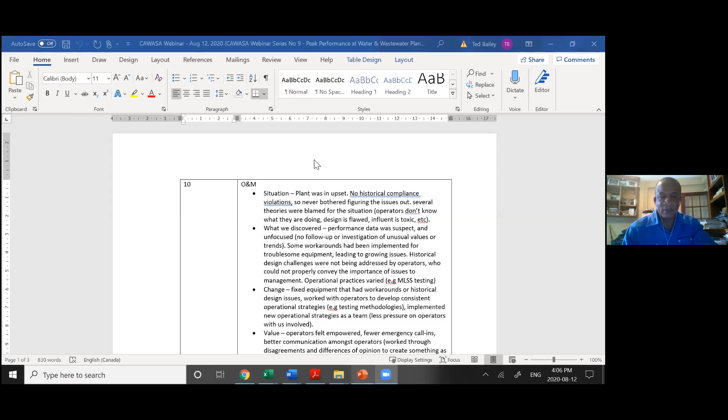Okay, good afternoon everybody. As Ignatius mentioned, we're giving a presentation slightly modified, but similar to what we gave in St. Lucia in February. It's about improving performance of treatment plants with a focus on enhancing existing resources, enhancing skills and resources within existing staff, I should say. So basically, in layman's terms, improving quality, reducing risk, reducing costs by using existing infrastructure, existing people, and through modifications to operations, maintenance, and management practices.

We've been doing this sort of service since 2005. As Ignatius mentioned, we're a Canadian-owned firm that's primarily worked in Canada, US, and a bit in the Caribbean, with WASA in 2008, 2009. We've been under a big push to work again with the Caribbean. We're doing quite a bit of development at the annual conference, and we've actually met with some of you over the past year and a half, but COVID threw a wrench into those plans. But we are hoping to restart some of that.

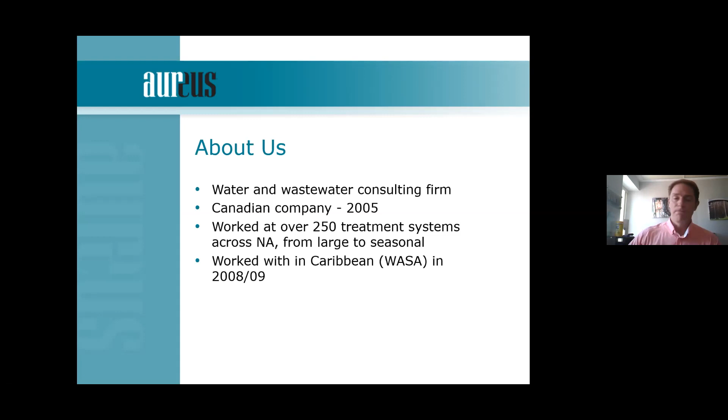Basically what we do is, we're not a design firm, although we are an engineering consulting firm. We focus on people first, ground-up solutions where it's focused on skills transfer. So we do a lot of procedure development, operations and maintenance procedure development, a lot of process consulting, health and safety assessments and hazard analysis, and maintenance and asset management consulting.

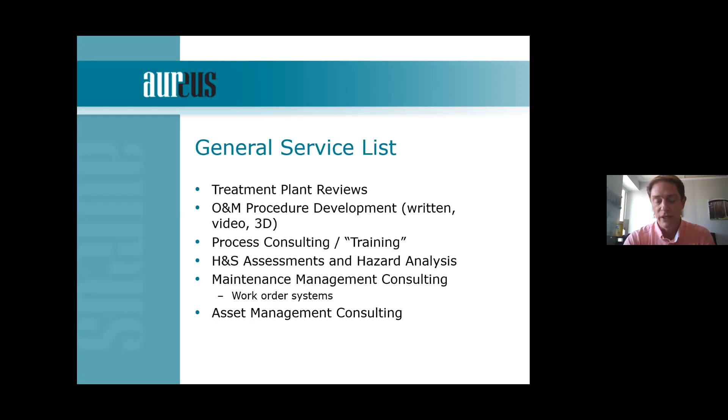So what we're going to talk about today is a program, or a tool actually, that was developed by the US Environmental Protection Agency back in the 70s. At the time, the United States had invested quite a bit of infrastructure money in the late 40s and early 50s, and these treatment plants were aging. The government realized they needed billions of dollars to upgrade these systems to current standards, to meet compliance requirements, performance requirements, etc. So in an effort to identify cheaper alternatives, they developed this Composite Correction Program out of the Denver Drinking Water Office. The goal of this program was to identify opportunities to improve efficiency, reduce costs, work with existing infrastructure in order to extend the life of these systems where possible.

It was very effective, but surprisingly it kind of fell off the map. I think one of the reasons is that from a consulting perspective, there's not as much money in this approach as there is in designing new treatment systems or new processes. So that's what we're going to talk about today: the thought process that goes through identifying what the root causes of a particular issue are. We're going to go through how one does that, what the typical root causes are, and some success stories about how we addressed some of these in our experience.

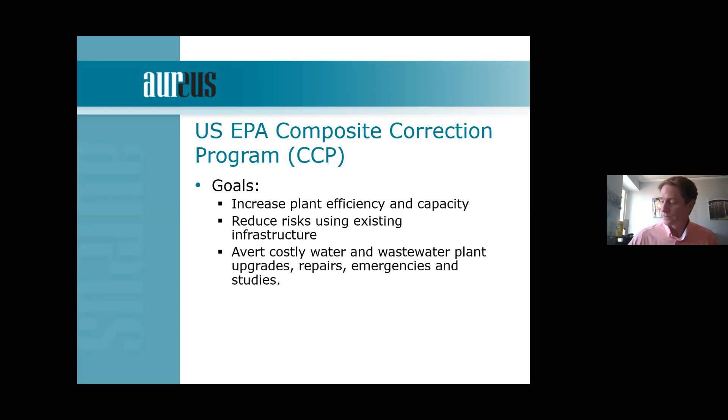I've mentioned a little bit about this. The approach of the Composite Correction Program is to work with operations, maintenance, and management staff to identify areas of improvement. It's really focused on empowering these individuals to ensure improvements are accomplished and sustained. I'll go through how one does that.

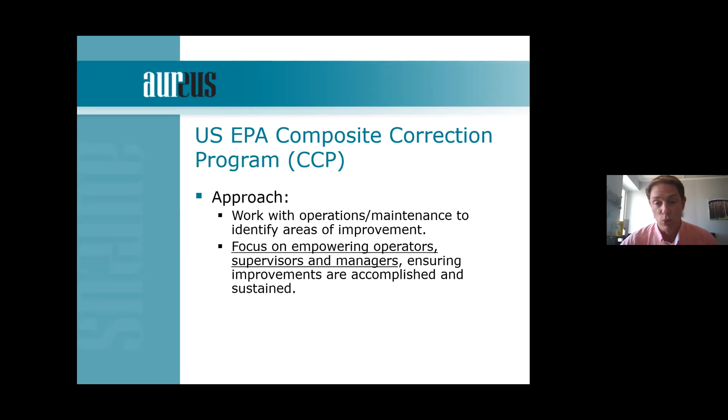In a way, it's a very simple formula, it's often about just listening. Most of these solutions are already available with existing individuals, the operators such as yourselves who have been working at plants for years, but sometimes the communication gets jumbled. Sometimes the messages get lost, sometimes there's just been a change in focus, or sometimes it's just easier for a third party to re-express some of this information. So what are some of the benefits?

This will become more clear as we go through the methodology, but essentially it involves establishing baseline O&M practices. We'll get into this in some of the examples, but in some of our experience, and probably yours, there are differences in O&M practices, maybe between operators, between shifts.

Maybe between generations. And these O&M practices can sometimes result in several paper cuts, if you will, that impact performance, impact production, impact risk, or they can be actually individually quite significant, but sometimes hidden in amongst the noise of the treatment process and alarms and other issues.

But that is one of the benefits. By agreeing upon standardization of O&M practices, we've seen tremendous results, which we're going to share today. Some of the other benefits: historical knowledge and lessons learned are captured at the activity and equipment level.

So this is something we're seeing a lot, and we're being called in a lot for these days, is experienced operators nearing retirement. Whether it's one person working at a facility or a very senior operator with junior operators. And sometimes maybe this senior person is unwilling to share information for fear of whatever. So what we do is try to tease that out and help pass on that knowledge to the younger generation or the new generation, whatever it might be.

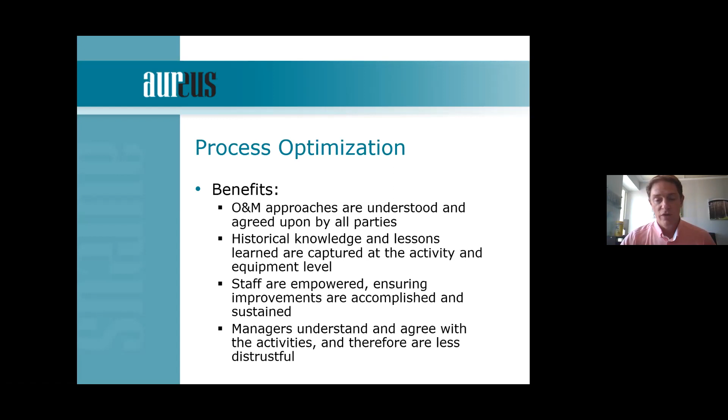By sharing these challenges in a collaborative way, and even as a third party sometimes saying something that has maybe been said numerous times before, there may be more opportunity for someone to hear that and change can occur, which is what we often see.

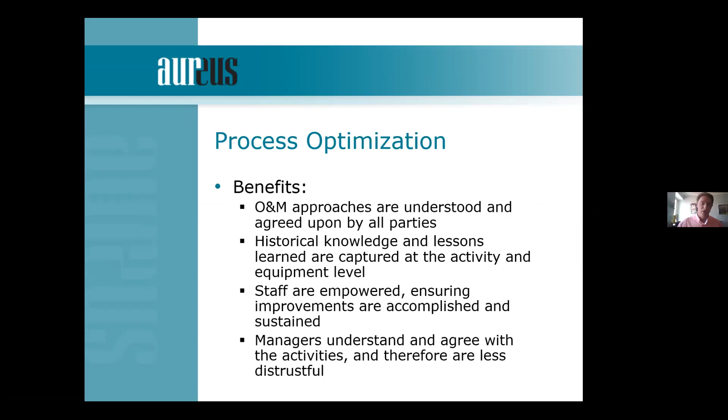So as sort of an example of the importance of each one of the elements, operations, maintenance, design, and management. Doug is going to give a local example of how these factors combine into a single disastrous event in Canada.

I'll just get you to flip one more. Yep. There we go. Thanks, Ted.

Hello, everyone. I'm Doug Thompson. I'm the manager of water and wastewater operations for Aureus Solutions. I've been with them, I guess, since 2015. Prior to that, managed municipal water and wastewater facilities.

As we know with many events other than Mother Nature, and Ignatius and Ted and I were talking about the hurricane season down in the Caribbean. Other than Mother Nature, though, most emergencies and catastrophes are not the result of any single event. Usually, what occurs is that a number of smaller events combine, and the resulting outcome leads to a complete failure.

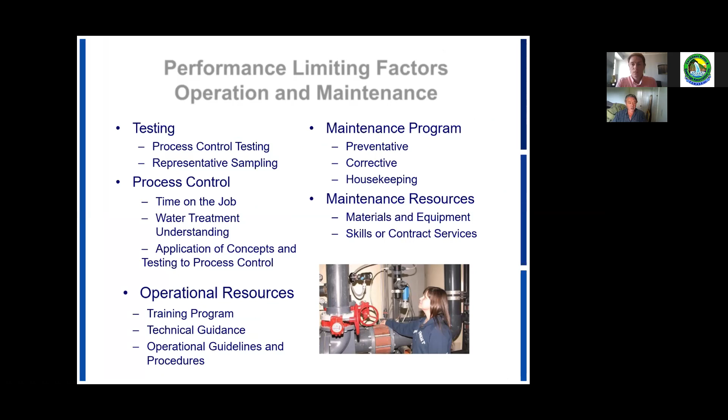The problem is, as Ted suggested, that becomes the norm, and secondly, that one particular modification can lead to issues with others. So from the process control testing standpoint, we can't control or understand what's happening with the system without proper testing. Therefore, one area easily improved on from operations is making sure you're testing at the right frequency and the right locations to understand how your system is working.

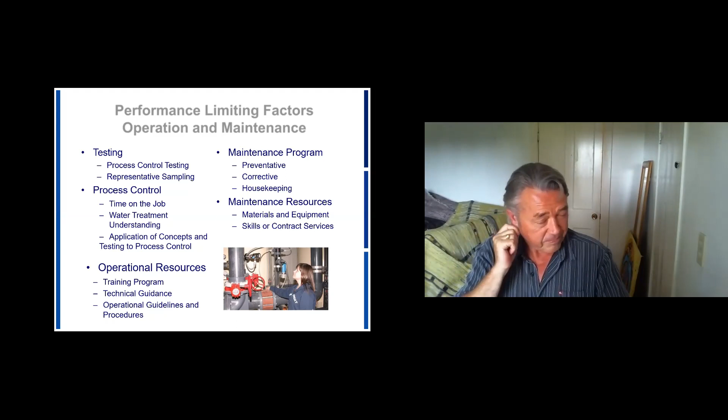And again, the representative samples—as Ted said, the sample has to be representative of what you're trying to achieve. The process control—doing the testing and getting the results is one thing, but understanding and interpreting those results is key as well. A lot of that comes with mentoring amongst yourselves, or from your training, understanding as you learn and experience.

So again, critical. And to that end, Ted mentioned that typically you'll get a lot of training from individual suppliers of components, but from the standpoint of the overall treatment process, it's how those individual processes work together and the impacts of changes in one process stream on the overall outcome. Operations is definitely a learning curve, and each individual facility is absolutely unique. It's like math—you need to know the basics, apply them, and expand your knowledge from that point.

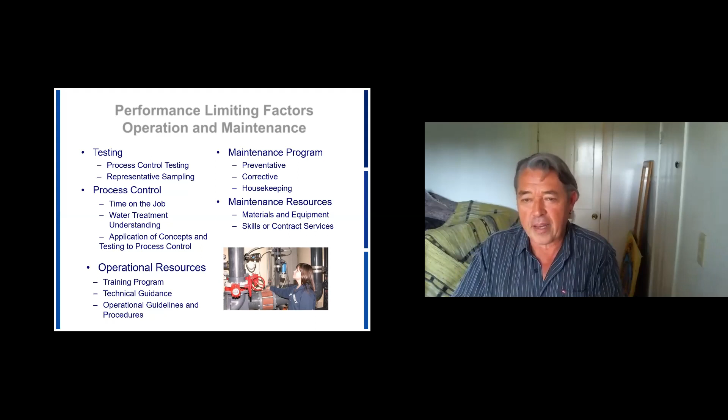So I'm sure many of you looking at this see potential challenges that you're facing at your facility. These are not unique. We see them wherever we go, bits and pieces of them.

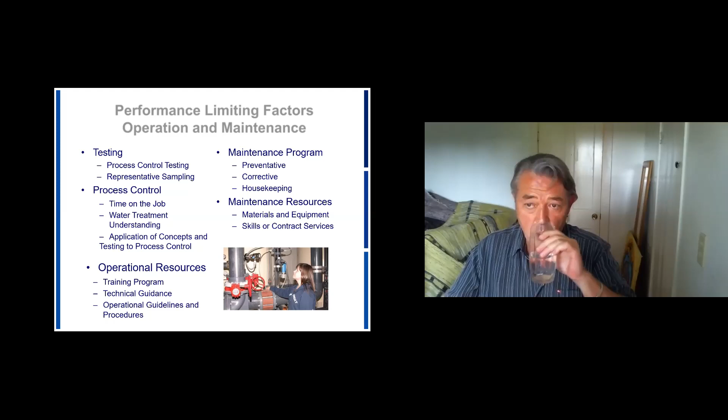But I guess to back up, how do we go through the process of identifying these? So again, the composite correction program outlines an evaluation step called a performance evaluation. It involves going through each one of the administrative, O&M, and design questions, over several hundred questions that one would go through and evaluate their system.

A lot of it is, again, what you're going to see today, common knowledge. A lot of it is probably already understood, but what becomes apparent as you go through it is the number begins to grow, especially as we dig into certain activities.

Now, we've started to shift our approach to identifying these performance issues to a different methodology. We originally were using the composite correction program, but we've modified it and actually started focusing on operations and maintenance procedures. So what we do is we go through each individual activity that one would perform at your facility. This is right from what's the daily tour of duty, what is the weekly, what's the monthly, what's the annual, and within those, of course, there are sub activities, right?

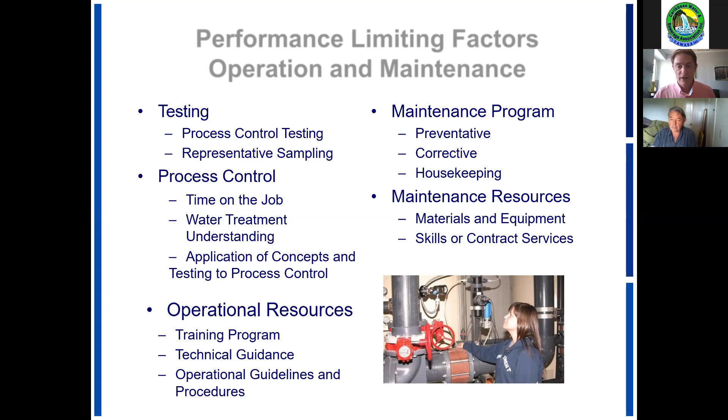And often the decisions are very small, what we need to do, and typically quite easy. But as I'll show you in some examples here. So this was a plant.

These are effluent results from a wastewater treatment plant, and the numbers represent individual sampling results that were above target conditions. So that doesn't mean they're out of compliance. They were just above the target limit for one individual sample. You can see 2010, 30, seems like a lot, but individually they're always in compliance. Same thing, 36, well, very close to 30, so seemed good. 19, hey, we even did better than this year.

But then all of a sudden disaster struck in 2013 and the plant went into complete upset. There, as I said, there had been no historical compliance violations. There were several theories, including the influent became toxic, somebody dumped something in - that's a common one that we hear all the time - that management had never fixed certain equipment, so of course that finally caused an upset, et cetera, et cetera, et cetera.

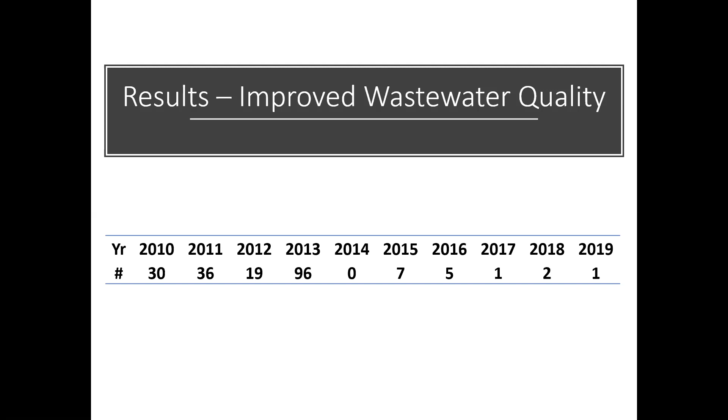But what we discovered as we started going through is that performance data was there, but it was suspect. There wasn't consistency. There were only 2 operators there at the time, but they were relatively new. There was a previous operator about 5 years earlier, 2010, and the data seemed to vary. And despite them doing the same sampling plan, right, same sampling points, same frequency, et cetera, there had been some workarounds that had been implemented, again, because funding had been lax. But again, they had managed it fine to date.

There were some, again, these maintenance and design issues. They had been raised by the operators over several years, but again, because management had become accustomed to hearing them, they didn't think of them as big issues, right? And in addition, management really wasn't spending a lot of time at the plant actually seeing some of these things firsthand.

So we started going through some of these issues. We started fixing the obvious things, the workarounds. We started collecting better data. We listened to the operators to find out what they thought the issues were. We went through these procedures.

On the procedure side, what we noticed was very interesting. Both operators worked different shifts, sort of Monday to Friday, and then the next operator would come for the next five-day shift. And one operator was always getting higher MLSS values than the other.

What we discovered was that one operator would stir the sample and then pour it immediately into the filter for their MLSS sample. The other one would stir, then turn on the tap to start the suction in the filter, and then pour, allowing a little bit of settling, about 3 seconds, we estimated. Within that settling, there was typically a 300 to 500 milligram per liter difference in the suspended solids.

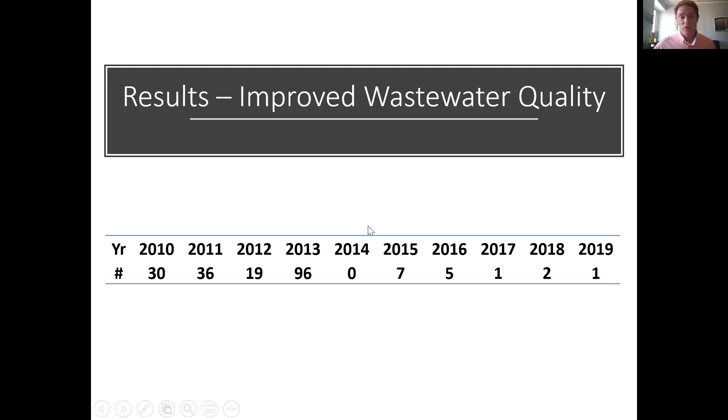The effluent dramatically improved. The owners and managers became more involved at the plant because they saw what can happen. They saw the impacts of their funding, lack of funding, and you can see the results moving forward have been tremendous.

Maybe I'll just add a brief comment there. To Ted's point, each of those modifications were small in amongst themselves. And it was just the combination of those individual small changes that led to that pretty dramatic improvement in effluent quality that you saw.

And this example is the same thing. We were asked to come into this plant. The plant was actually in compliance again, off and on, but they were doing okay. They had been changing operators quite a bit, so there was no consistency. There was limited experience within the existing staff because they were getting fairly junior people.

No one paid much attention to the plant from a managerial standpoint, because they didn't want to know. And so historical bad practices had started to slip in, workarounds had started to slip in, and all of that knowledge was gone. You could maybe tease it out of the logbook, but the logbook practices were a little, and when I say suspect, in some cases they weren't keeping a logbook.

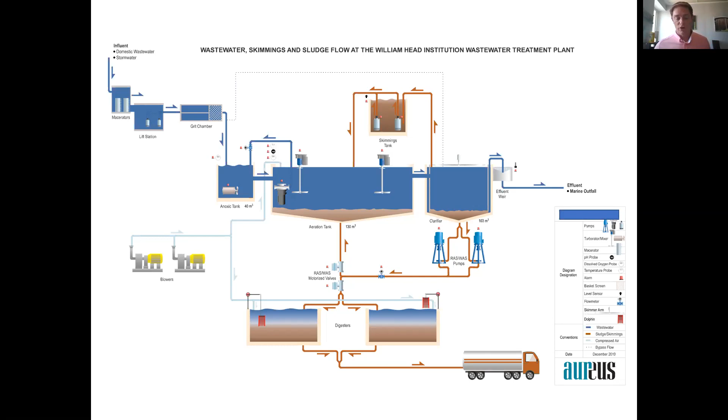We started working with the local operator to troubleshoot, to enhance his understanding of the system, working side by side to troubleshoot some of these issues. And now the plant runs like a top, and everybody is involved and happy. We can see now that this is going to be a long-term solution because the operator is empowered, the managers know how to support, and it's no longer sort of an ugly stepchild.

So I think I'm going to skip these. We've talked about these in some of the examples.

One thing we didn't mention that is a good indicator there may be some challenges is alarms and overtime hours dealing with alarm conditions. These can creep up on systems where it's 5 alarms, then 7 alarms, and 5 years down the road no one even remembers 5 alarms - now 15 is always the standard. Time and time again, when we dig into why we're getting these alarms and how to fix them, looking at these three areas and identifying root causes, all of a sudden there are dramatic changes. That just makes it easier as an operator too - you're not constantly on edge every night wondering, am I going to get called in?

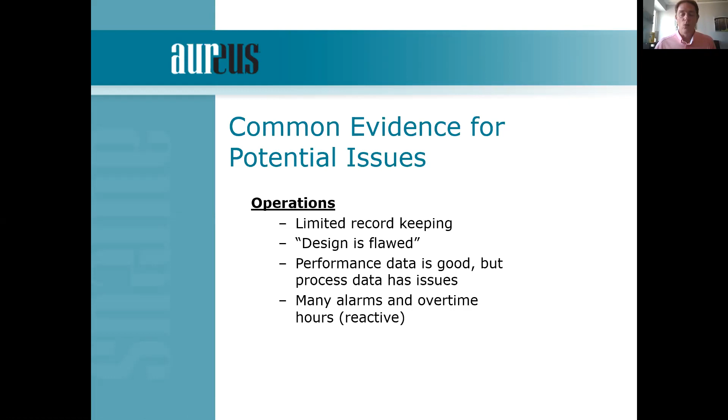So the next thing is administration. We've talked about some of these examples already. For administration, this is really management and ownership combined into one.

Policies, health and safety is a big one - are those in place? Do the operators feel safe and empowered to do their work? Do they have the necessary tools and PPE, et cetera? And tied in with that, are the administrators familiar with the plant needs? Are they coming down, are they visiting, are they seeing these issues firsthand, which is tremendously powerful? You see chemical leaking on the ground - it's much easier to say we need to fix this than hearing it over and over in a meeting.

Long range planning, again, this is a huge one. Plant staff coverage - this is a constant battle, right? Trying to achieve the results with as few people as possible. Sometimes we have to deal with that, but obviously we try to avoid it. Work environment - I'm going to give an example of how work environment can deteriorate quite a bit due to some of the challenges with administration, and it doesn't need to be a bad boss or bad personalities. It can be just lack of support and focus. And of course, financial, right?

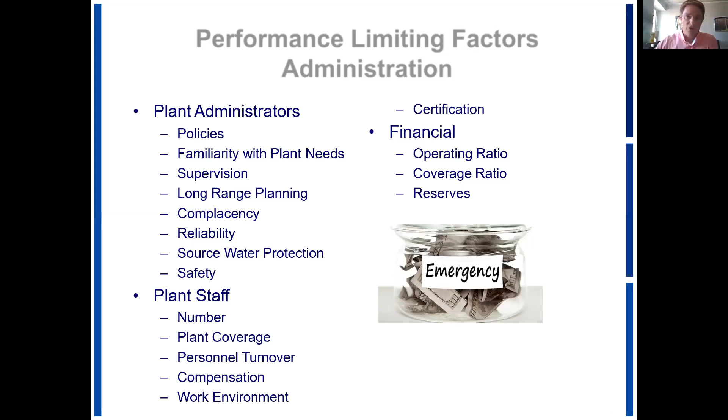Operators had different strategies, there was no accountability, et cetera. So what we started doing is working through the procedures with each operator individually and bringing in the management team to collectively decide how we wanted to run the plant, do our best. 99% of the activities were the same amongst operators. There were a few deviations, and those were easy to sort out because it wasn't two individuals trying to sort something out - it was a collective team, and the manager was present and supported and offered solutions if one couldn't be identified. We just started having weekly meetings to see if we were following these procedures, where we weren't, and what we needed to adjust.

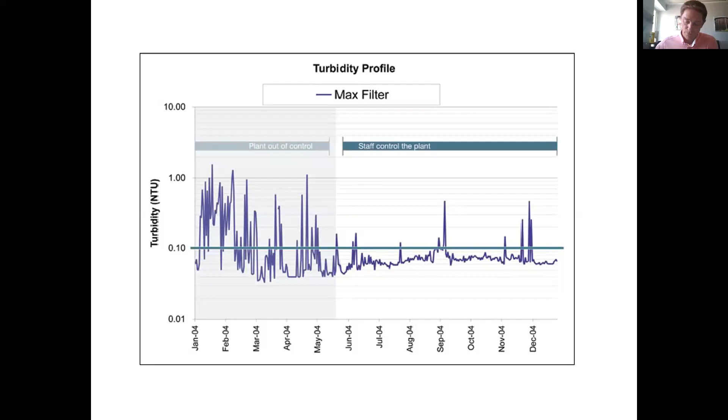And I think it was mentioned, but I don't know what the response might have been - I'm assuming suck it up and do it. And so over time, the solution was, well, let's just slowly not do it. Moving from monthly to a month and a half to 2 months to a year.

And of course, at one point there was a bit of a suspended solids breakthrough in the plant, which resulted in high E. coli because it kind of blinded the UV system. And the downstream water body that received it is somewhat of a swimming river, so it raised a lot of concerns. Nothing happened in the end - it was diluted and okay, but certainly caused a lot of fear.

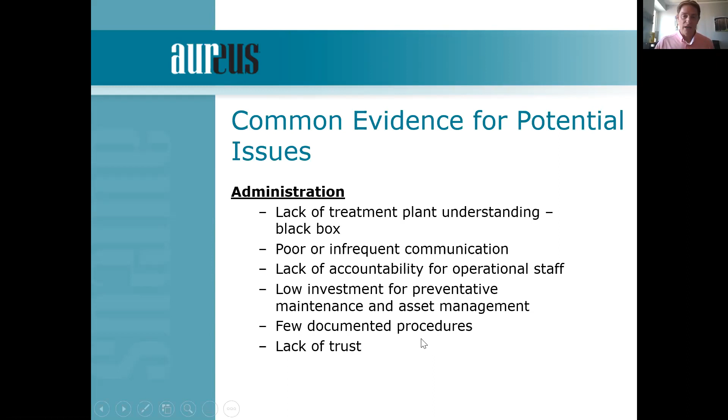Ideally, they're visiting the plant regularly, but sometimes that isn't always possible. Communication, again, in all different forms. And a lot of times these lead to lack of trust, which then leads to further problems.

So finally, design is one of the last performance limiting factors. I'm not going to go through this - you all know what can happen with design, many different issues. The big thing we see is the biggest problem we see is during the commissioning period, where an engineering consulting firm and contractors are commissioning the equipment.

They maybe have a time frame at which this information is passed over, but there are a lot of things happening during that time period. The operators are new, they're learning. The consulting firm and the contractors want to get out of there as fast as possible. In fact, in a way, they're incentivized to, because then they can kind of ignore problems from afar. And they often don't go through the necessary steps.

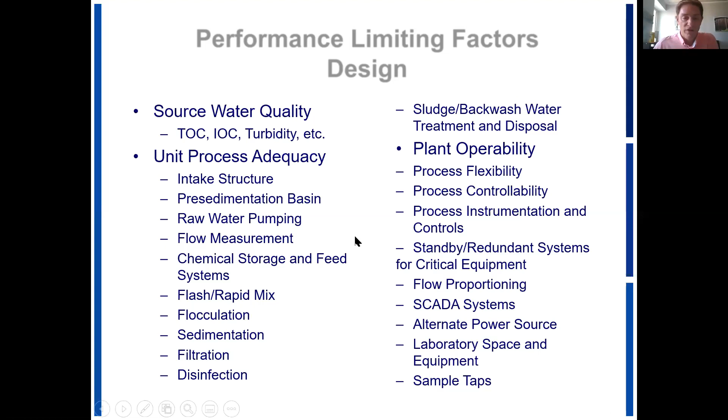And this is a perfect example. Doug's familiar with this plant.

This is a plant that we've been working on for a few years. The design concept was to provide a completely automated system that would be operated remotely by an operator about 10 hours away, approximately. And this operator would then come in once a month and check up on things.

Luckily we were brought in at the commissioning stages and started to go through the procedures and how everything would be done. And what we discovered was that there were a few missing elements to the design that were going to completely unravel the operational strategy that the client had in mind, including no alarm dial-out.

So here you've got this brand new, multi-million-dollar plant that you want to operate remotely, and there's no alarm dial-out, or no ability to monitor remotely. Those seem obvious, and they were caught early.

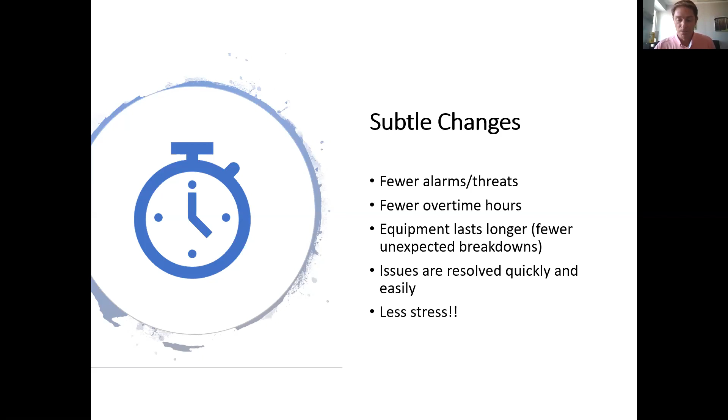As I mentioned, making subtle changes by digging in and looking at activities step by step leads to fewer alarms, fewer overtime hours, and less stress for individuals. It becomes a better place to work because we're in control, we know we're in control, and we feel supported. Then the shift moves from emergency response, a fight-or-flight work environment, to a proactive one because more time becomes available. We've addressed lingering historical challenges, and now we can get into preventative maintenance, which we never had time for. Management may now be willing to invest because they know things are working and progressing at the plant. So anyway, that's just a quick snapshot.

I would have loved to dig into some of the actual analysis that the composite correction does, but you can easily look that up online. It's so system-specific I didn't think it would be a great topic to cover, but you can find it online; the manual is available for free. You're also welcome to shoot me an email if you'd like to see a template of what we've done for a procedure, if you'd like to try to recreate that at your facilities. I think it would be well worth the investment.

Ted and Doug, we had a very extensive presentation, and I trust participants found it useful. I'll invite them to ask any questions or share comments they wish to at this time. Quick question. Go ahead.

At the first sign of any abnormality at the treatment plants, what would be your advice in terms of reporting from the operator standpoint? What specific reporting time frame would you suggest the operator use to report that abnormality?